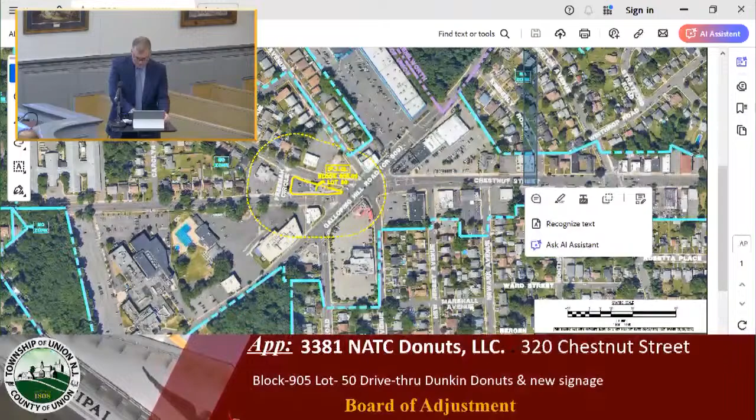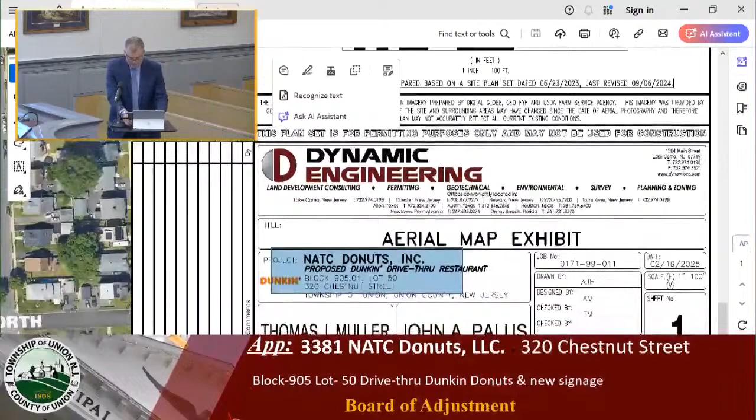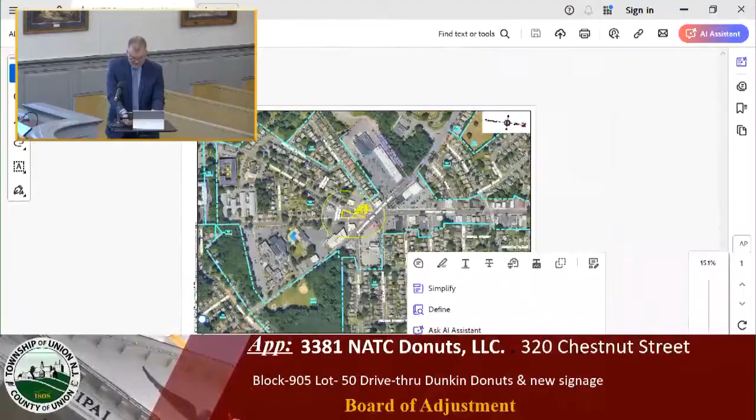The first one is up on the screen now, entitled Aerial Map Exhibit, with a preparation date of 2/18/25. It's similar to the aerial map in the site plan set, not modified for presentation tonight. So we'll mark that A8. Just putting this up on the screen to give the visual.

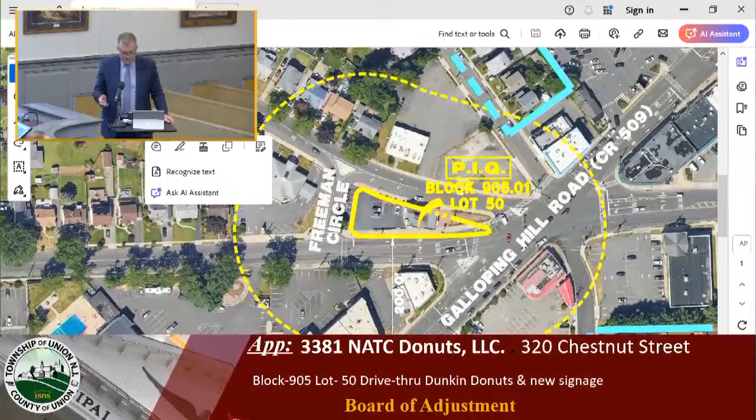I'm sure the board is very familiar with the location of the site at 5 Points. The site is bound, as you look at the parcel in question, outlined in yellow, noted as block 905.01, lot 50. It's a lot of 0.253 acres, or just a smidge over 11,000 square feet. You can see it's an irregular shape, triangular shape, and it is bound by Tucker to the west.

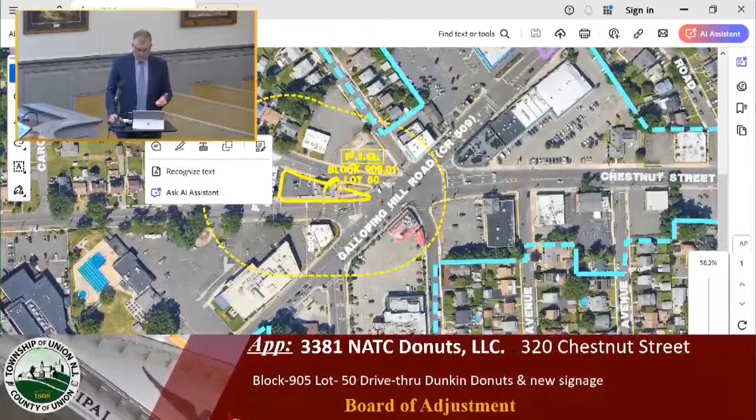You have Chestnut to the east, and Freeman Circle, which is the connection between Tucker and Chestnut, to the south. Surrounding the site, really on all sides, are all commercial properties in the NC zone, and just beyond that, beyond those commercial uses, are residential uses, as you can see in the exhibit. That's really all I intended to do, is just to give basic bearings with respect to the location of the site via this plan, and then I'll look to move on to the next exhibit.

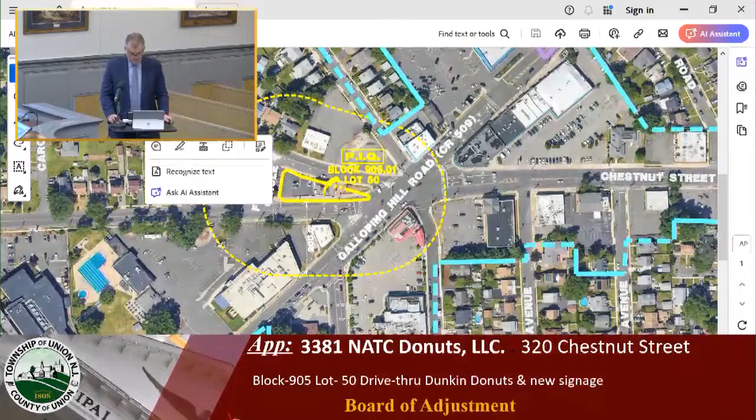Sure, Brett. Just to confirm something I mentioned in my opening, this site is bound by 2 roadways that fall under the County of Union's jurisdiction, correct? That is correct. Both Tucker and Chestnut are under county jurisdiction.

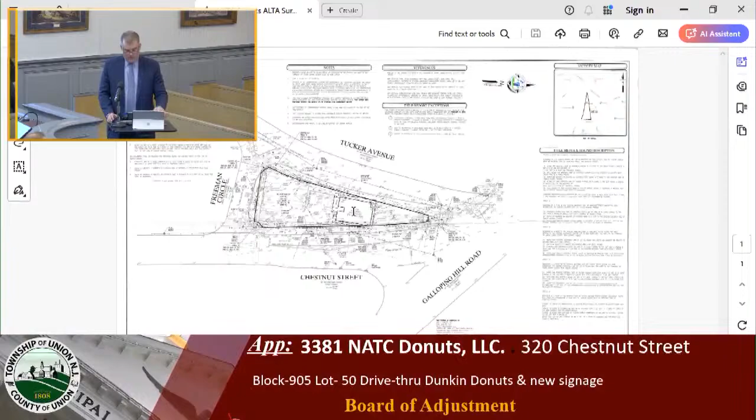Currently on the site today is an existing Dunkin' restaurant, of 1,453 square feet. There are no drive-throughs. It does have two access points, one at Tucker Avenue -- I'll zoom in a little more to the plan -- there's one access drive off of Tucker, very close to the turn getting onto Freeman Circle, and then directly opposite that on Chestnut is the second driveway.

There are 16 parking spaces that serve that restaurant currently today, and as you can see, most of the site is comprised of the building, the paving, and then out in front towards Galloping Hill Road to the north is a paver area that also has the current ID sign located within it.

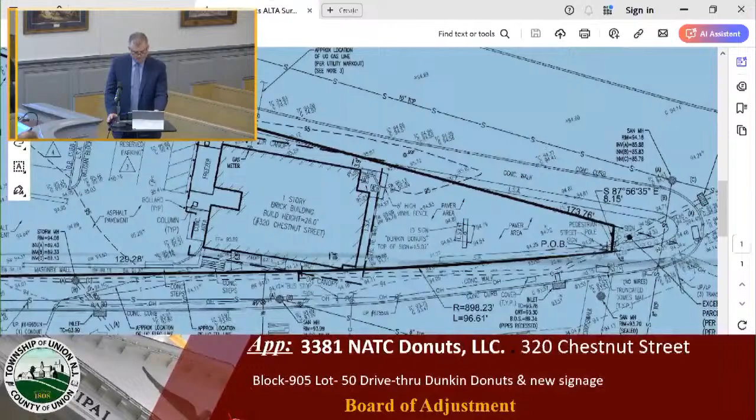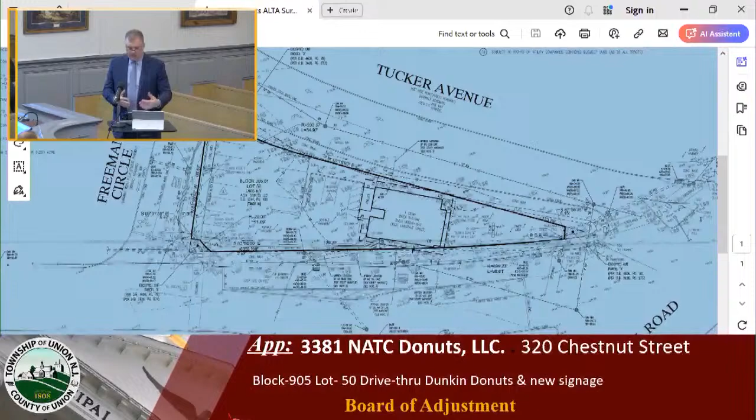As I noted, and we'll go through this further when we talk about the variances and waivers, you can see the irregular shape in more detail here. The building, as it currently stands, sits basically right on the property line with Chestnut Street, almost on the property line with Tucker. Same thing with the ancillary parts of the current layout, the parking, the trash enclosure, all sit in very close proximity to the property lines. We're going to be looking for similar relief for those same structures, but we're looking to improve upon that with the new plan. You'll see that as I turn to it in a moment.

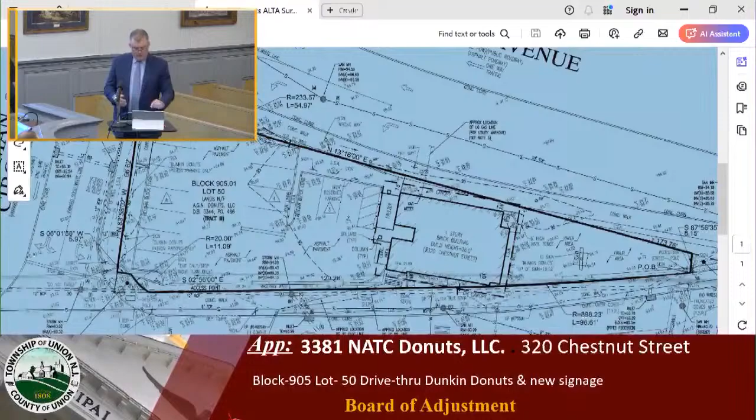With respect to this plan, all existing utilities are there today, and we're looking to utilize all those same utilities. There are sidewalks on both Tucker and Chestnut that exist today. We're looking to replace those upon our discussions with the county, and I'll show that in the proposed plan as well.

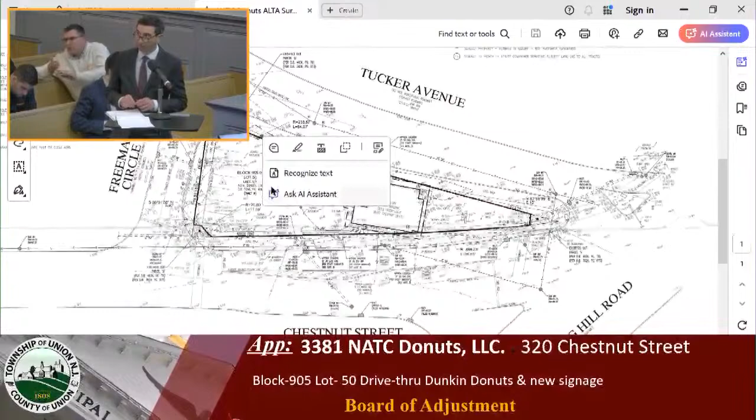Before you move on, regarding existing site access and circulation, are there any restrictions currently, or are those just free-flowing driveways? No, there are definitely restrictions. Tucker Avenue right now flows from Galloping Hill Road - you turn onto Tucker, it is one way from north to south, and you're able to either proceed straight on Tucker, or make the left onto Freeman Circle, which is also one way from the top of the page down to the bottom.

As a result, Tucker Avenue is only permitted for left turns in and left turns out, whereas on Chestnut Street, that driveway allows full movements in - you can make left turns in or right turns in - but you can only make right turns out of that driveway. There is a sign that prohibits left turns out of that drive. Chestnut Street is two-way, so you can travel in either direction.

So if there are no other questions with regards to the survey and the existing conditions, I'll move on to the proposed plan.

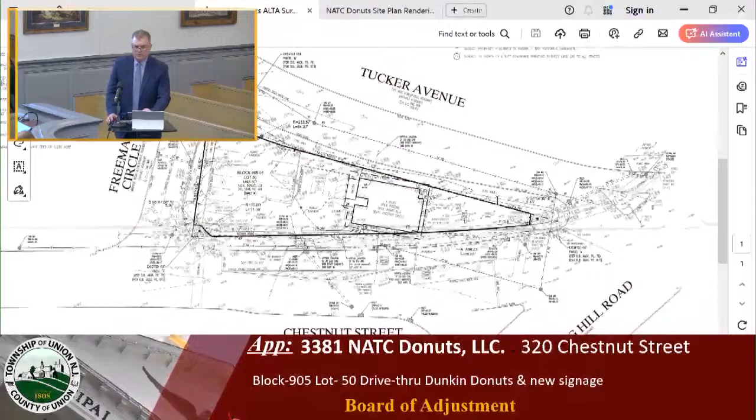And you know what, I'm sorry - I didn't do this, Joe. I did not describe the aerial for the survey record. It was A9, yeah, you're right. I didn't describe it. You want me to just throw the description on the record? I noted it for the record. A9 is the ALTA survey version, and A8 was the aerial map exhibit. So we're up to A10, I guess, which is this colorized aerial.

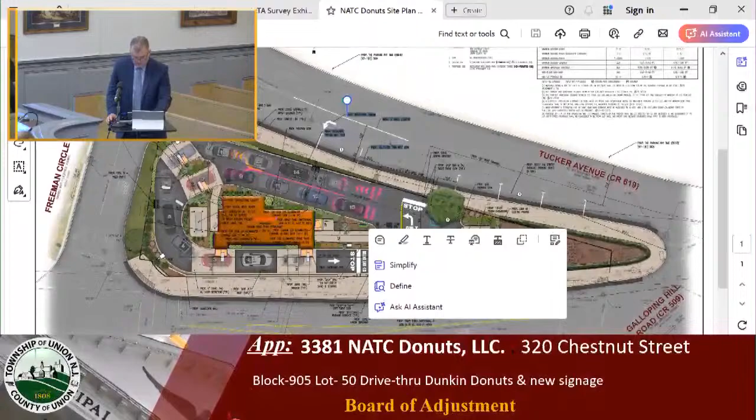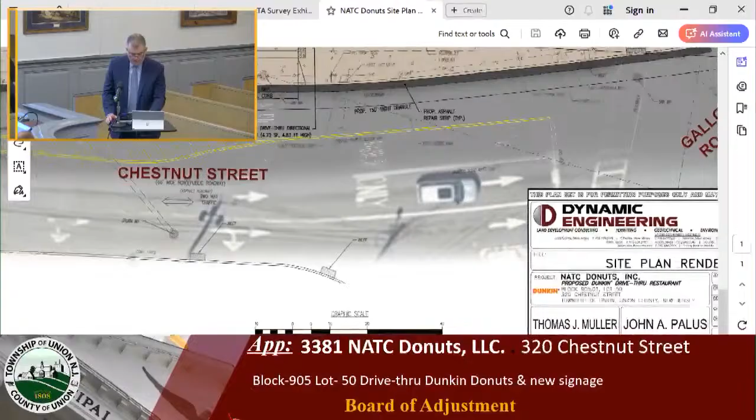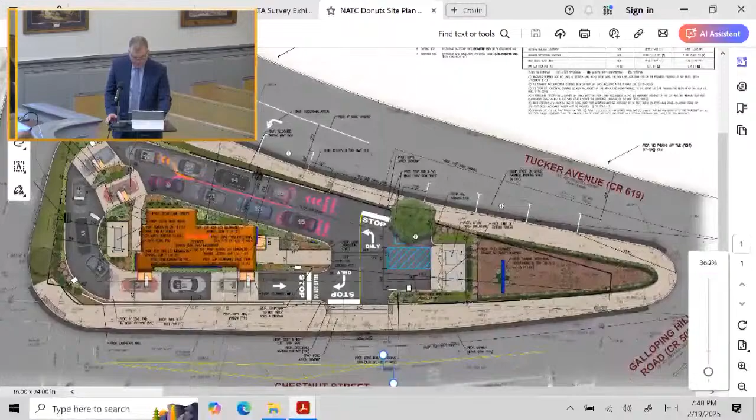Yes, and A10 is the site plan rendering, with a preparation date of 2/19/2025. This site plan rendering is a colorized version of our site plan, which has been enhanced to show the colors of the building, paving, and pavers. You can see those pretty clearly, but also landscaping, highlighting sidewalk and other concrete areas being proposed on the site, as well as those that exist around the perimeter of the site. So once again, same configuration as the previous two exhibits, with Tucker to the top, Chestnut to the bottom.

The proposal is to demolish the existing building and construct a brand-new structure of 1,090 square feet, approximately 350 feet smaller than the current structure that's out there today. So a smaller structure, and now we're going to introduce the drive-through component, which is not there today. So it'll be drive-up lanes, two entering into two ordering windows or ordering stations.

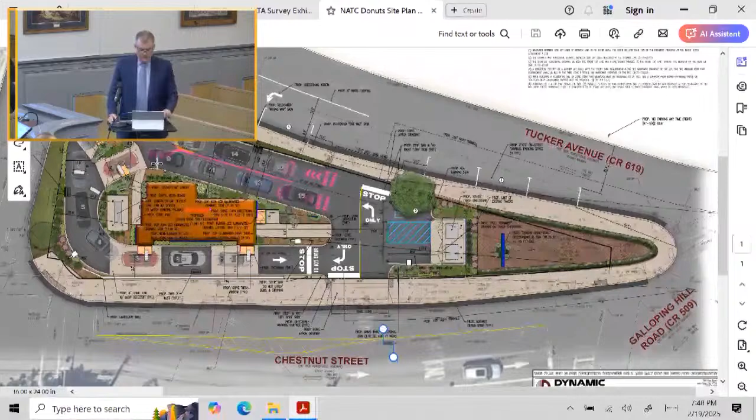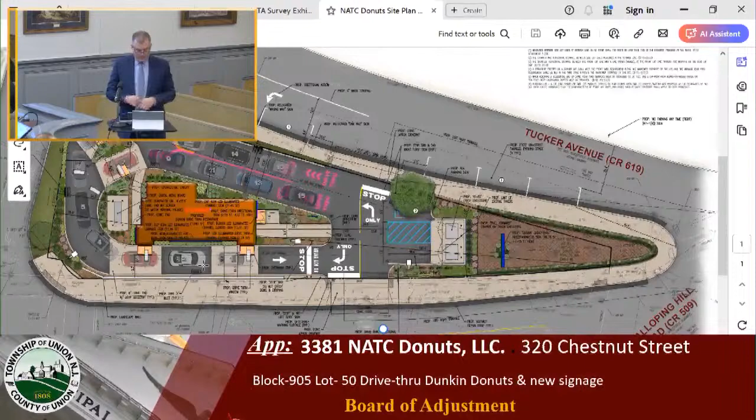Those are located in this plan in the upper left-hand corner, as you're looking at the plan - I'll move the cursor to it. I'm sorry, this is my first time not using a paper exhibit and using the electronic one, so it'll take me a moment to get used to my bearings here. So you have the ordering stations, which turn into a single lane that proceeds around the building in a counterclockwise direction. We only propose 2 parking spaces on the plan.

Per code, this is a restaurant. For restaurants, code requires 1 parking space per 60 square feet of floor area, but notes that net floor area is defined as public area. We don't have public area inside this building - only employees will be in here. There will be no seats, no ability to walk up and order. You're basically only ordering through the drive-through lanes. So with no employees in a public area here, we technically, per code, require 0 parking spaces. But we are providing 2.

Those are located off just to the north of the building - I've moved the cursor there - and just beyond. One of those spaces is an ADA accessible space, a van accessible space.

We are moving, as a result of that shift of the building to the south from where it's located today on site, we're also moving the access. This was obviously the key point, as Mr. Reparo noted, why we had our discussions up front with the county and ultimately the police, to get an understanding that our shifting of the building, our movement of this access, particularly given the unique arrangement of the roads, how they all fall together. It's 5 points, multiple roads, multiple intersections, that they would be accepting our change to the access.

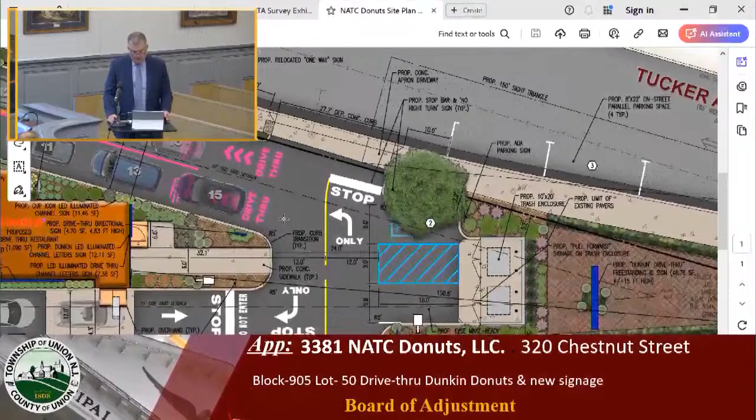When it comes to building facade signs, there is one on each side of the building. The requirement per code is 10% of the facade area allowed for each sign, and we fall under that requirement for each one. The north facade sign is 22 square feet where 34.92 is allowed. The south facade is 11 where 35 is allowed. The east side is 81 where 87 is allowed. The west facade is 11.5 where 87 is allowed. So well under for each one of those locations.

When it comes to sign dimensions, they all meet the requirement, including clearances and projection. As for illumination, the signs on the north, west, and south sides are internally illuminated. The one on the east side, the largest sign, is externally illuminated with 10 gooseneck lights that shine down and project light onto the sign, positioned so you won't be able to see the fixture itself.

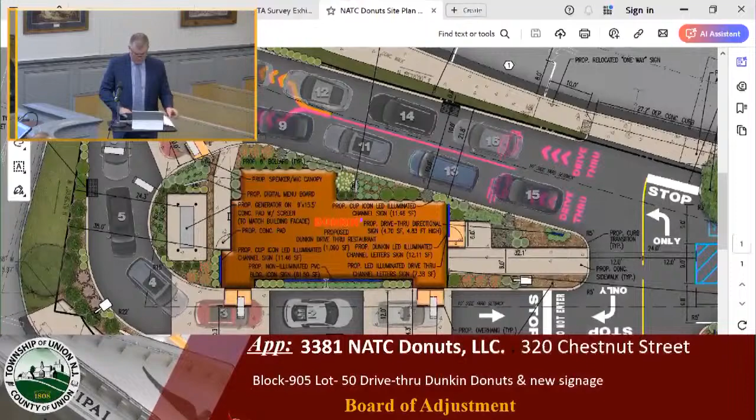There's a couple things, Brett, if you're done with your direct, I wanted to circle back to. One discussion point, my understanding, with the county was what's shown on your plan as proposed parking on Tucker Avenue. Can you speak to that? Yes, I can.

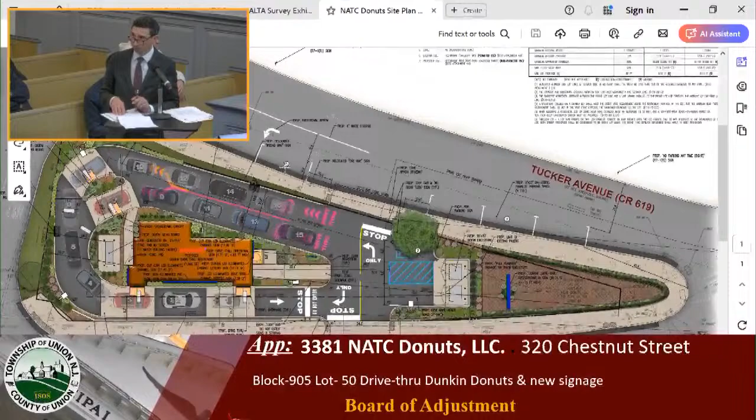So, I mentioned that there are two parking spaces on site, but we were also proposing 4 parking spaces parallel on Tucker Avenue. You can see those designated. I'll zoom in a little further. They're up against the curb, parallel, 3 to the north side of the driveway and 1 to the south side. The county, as part of their endorsement of this project, endorsed those parking spaces in their right-of-way. So technically speaking, while those are off-site, we do have those 2 on site plus the 4 to utilize, so 6 in total for the plan.

We're going to have the operator come up shortly to talk about operations and additional information. Your understanding from discussing this project with the applicant and the operator is that that's effectively where some folks are parking now currently, correct? That's correct. So this proposal is really just formalizing what's happening out there today. Is that accurate? That's right.

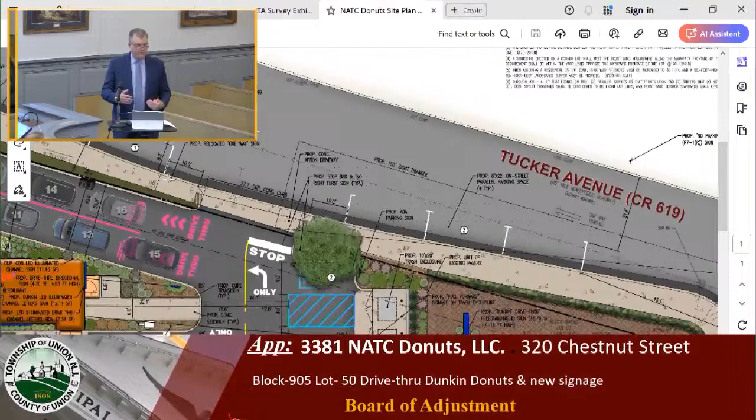Tucker Avenue, from an engineering standpoint, you mentioned it's one way. Are you comfortable that because it's one way only, having those parallel parking spaces will still allow sufficient drive aisle width? Yeah, absolutely. It's not only one way, but it's a very wide cartway that's there. So there's more than sufficient room to provide those stalls and still allow for safe movements, both for cars to veer off either into the lane to go straight ahead, and also get into the lane making the left-hand turn while a car is parked in the parallel spot, south of the driveway. You have enough room for 3 cars side by side there.

Great. And again, I know operations testimony will be coming shortly, but you worked with this operator and applicant regarding what's anticipated for deliveries and refuse. Your office took a look at the types of vehicles servicing this facility - have you designed this to accommodate those vehicles? We did, and in our plan set at the end we do have a truck turning exhibit for the garbage truck. We see no issue with that.

Our client works with a private hauler. They'll ensure the timing of that truck delivery isn't coinciding with peak hours of operation at the facility, but we do have enough room for the vehicle to enter in. Not unusual for a site, other Dunkin' sites, for the truck to make a couple different maneuvers, but he can get in to maneuver, back in, or go in if it's a front loader, forward to the trash enclosure, pull out the bins, dump them, and then back up and maneuver on his way. We show that in one example of one maneuver that can be done in the plan set.

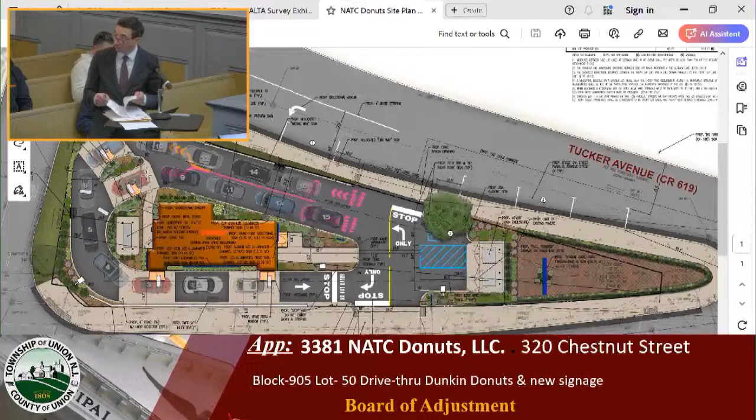Brett, you've had an opportunity to review the reports. We've already identified that police and fire no longer have any comments regarding this application. The Colliers report, the township engineer dated November 18, 2024, you've hit a number of these items. I know the planner will talk to the variances. From an engineering standpoint, is there anything recommended by the township engineer that you take issue with, or that requires a response, or are all these satisfactory?

There are just a few, and I think starting with, obviously the first page is a summary. Page 2, no comment. There's statements that I agree with.

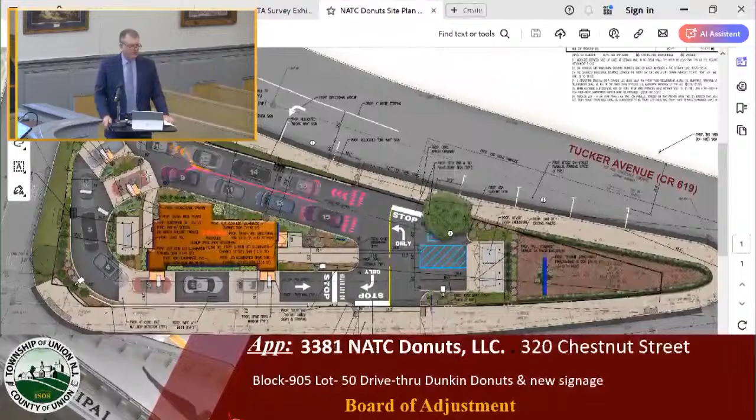If you go to page 3, item 1.8, it brings up the number of parking spaces. We do have the 2, as I described before, in accordance with the calculation done based on a restaurant use. It's noted, though, that the ordinance requires 5 parking spaces, and I don't necessarily agree with that because the 5 parking spaces doesn't conform with the restaurant requirement. But regardless, I did note we do have 4 parking spaces out along the street, so we have a total of 6. So it's really we have 2 on site, 4 outside, total of 6. I think we meet the requirement as a result of that. It's just that we don't have all of them located within the confines of the property.

Item 1.16, we need to address, and that's for parking spaces requiring a 2-foot overhang. For the 2 parking spaces that we have on site, for the stall that's not the ADA stall, we do have the overhang, so we have an 18-foot stall. Then we have an area of concrete before we get to the trash enclosure, so there's room there to meet the 2-foot overhang requirement. But with respect to the ADA space, we don't have that. We have a sign and some landscaping that's prohibiting that 2 feet from occurring. We'll shift that sign and the landscaping back to be able to meet that.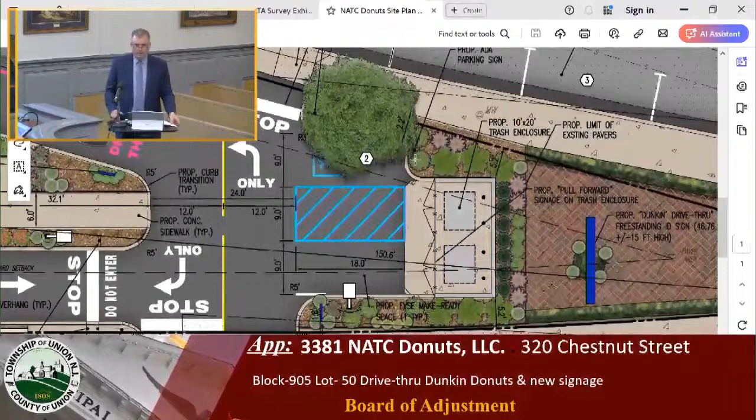So 1.16 will be satisfied? Yes, we will satisfy that. I think I touched on 1.17, which is a statement noting that the parking spaces need to be on-site, but we do have the ones that are off-site that we're utilizing for our benefit. I have no other comments on the rest of page 4.

On page 5, I do want to address, under traffic and circulation, number 6, the first bullet, there is a request by your engineer to install a concrete median in the driveway on Chestnut Street. As I noted, Chestnut Street is the driveway that we are proposing as right-in, right-out. But the county does not allow for concrete medians within their right-of-way. So in order to facilitate putting a concrete island that'll channel traffic, that island needs to be within the right-of-way, and the county does not permit that. So we will not be putting a concrete island there.

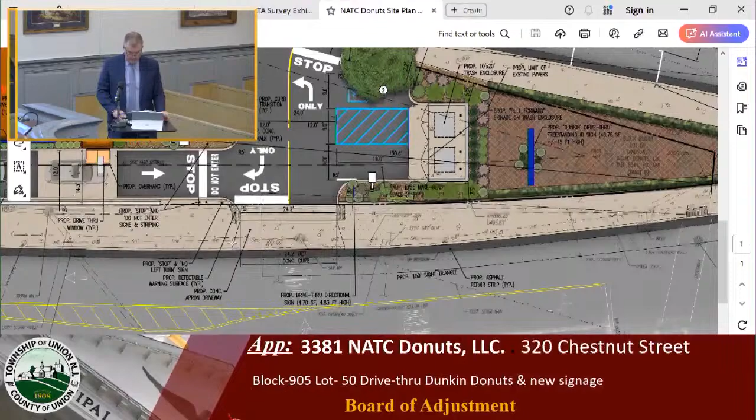Do you know if Colliers is aware of that, or can I note as a follow-up with them so they understand it? Yeah, we would follow up with them, but again, it's a county standard not to put that. I understand, but I don't know if they have an alternate recommendation that might apply. We can contact them to go through that and make them aware of the county's response to that item.

I don't have any other comments. Everything else is satisfactory? Yes. If this board were inclined to approve the application, you could satisfy the remainder? Yes.

Board members, I have nothing further for Mr. Scapinetti, and that's it on direct. Again, I just want to be clear that we have extensive operational testimony coming, and we do have a traffic engineer that's going to talk about circulation and traffic-specific testimony. At this time, are there any board members that would like to question Mr. Scapinetti on the testimony he has provided?

Hearing none, are there any members... I have a question. Mr. Benavente? My concern was food delivery. You mentioned that there'd be a 30-foot box truck that would come in. That's right. A couple questions.

You mentioned it's going to come off-peak. Let's say it doesn't get there off-peak, what is the alternative? Second, you said it's going to take up the inside lane where cars 13 and 15 are designated. I think 2 cars are shorter than 30 feet, correct? No, with the space in between and the length of those cars, no, we would be at 30 feet there. Okay, my next question is, so it's going to be able to make that turn.

Let's mark this one - we're up to A11. Can you describe what's on the screen as A11? This drawing is numbered A1, it's the proposed floor plan. This is a 2-sheet exhibit dated February 13th, 2025.

What's displayed on the screen is the floor plan for the proposed Dunkin', correct? Yes. What you have here is the proposed floor plan. I want to start by saying this is the state-of-the-art drive-through from Dunkin' Donuts - a skinny-down version from a typical store, with no sales area, no customer seating, no tables and chairs. This facility is strictly a drive-through operation, and since COVID, Dunkin' has devoted enormous resources to making the drive-through more efficient.

Back in mid-1990s, I worked for Dunkin' Donuts for 10 years as a construction manager, and I worked on the first drive-through in Totowa, New Jersey, where we had the menu board right next to the window, so it was sort of a pull-up type operation. It's come a long way in making this as efficient as possible.

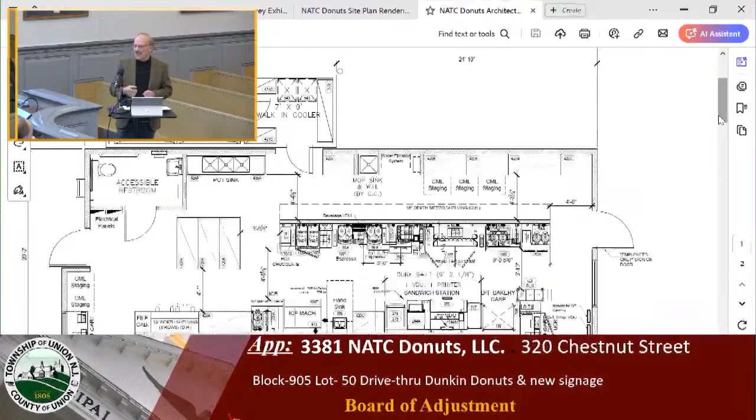It's called an omni layout, where all the equipment is very closely stacked together in proximity to the window to maximize throughput and efficiency, so that cars could continue through the drive-through lane without any substantial impediments. Both from an exterior site plan and interior floor plan, this facility really addresses maximizing the efficiency of the drive-through.

Having worked in this industry for many years, the dual lanes, the separate pay and pickup windows, and the modified interior layout are what distinguish this proposal. A typical drive-through has one lane, one menu board, and one window. We have two drive-through lanes, two menu boards, two windows - one for the monetary transaction and one for pickup. It's by far the most efficient layout and site plan I've ever worked on.

Before we move to the elevations, there was discussion about the signage, and we want to show those pictures that you prepared. I'll do the exterior elevations.

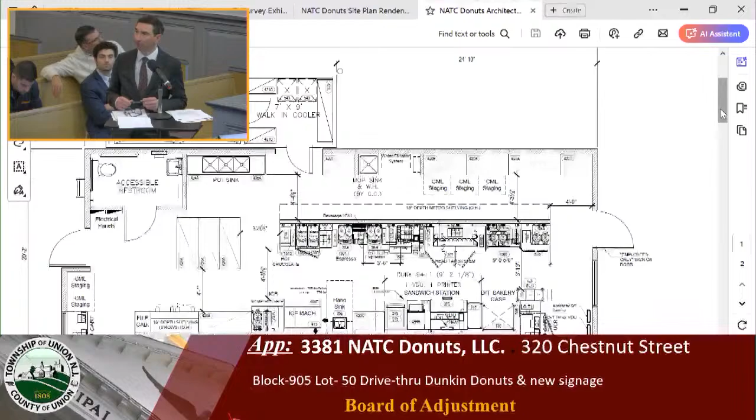This facility is a little over 1,000 square feet - the proposed is 1,090 square feet, and the existing comparison building is over 1,400. This is a significantly smaller building for this site. A typical Dunkin' without a drive-through is about 1,800 square feet, so we're considerably smaller since we don't have a customer sitting area.

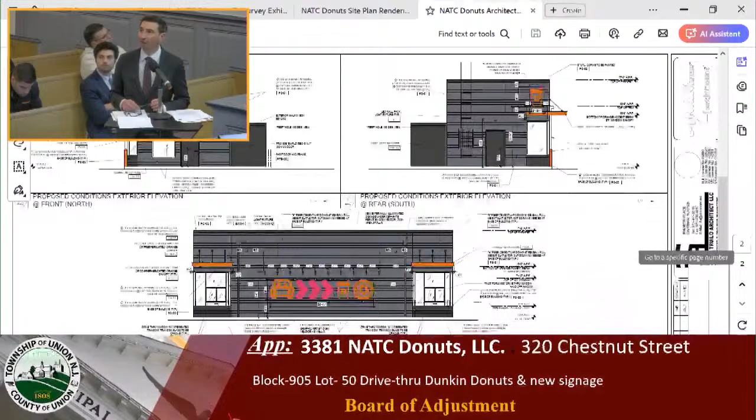If you could walk the board through the exterior elevations - I spent considerable time bringing up the aesthetics as far as the latest concept and signage package. The elevation at the top left of the sheet represents the elevation facing the Five Points intersection. We have a Dunkin' drive-through sign here, internally illuminated, with an orange accent band, and in the background you can see an overhang over the drive-through window that shelters the drive-through function during inclement weather.

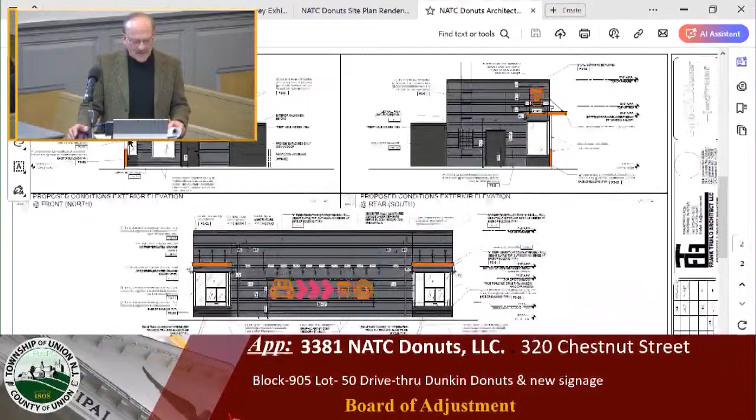The building is composed of Hardie plank siding, which is a cement fiber board. It looks like wood, but it doesn't rot and lasts far longer than ordinary wood. This door here is the employee entrance door, and it's also the door the employee would use to deliver a large order to the pull-forward customer.

The elevation to the right is the elevation facing Freeman Circle. We have a Dunkin' Donuts coffee cup icon, which is internally illuminated. You can see on this side we have the drive-through canopy. This is over the pay window.

The elevation in the middle of the sheet represents the elevation facing Chestnut Street. We have graphics in between the two windows. These graphics are not internally illuminated. They're vinyl decals stuck onto the building, and then we have a series of light fixtures. They're small LEDs, 4-inch diameter, and they shine directly on the sign, so there's no glare onto Chestnut Street. The first window on the left is the pay window, and then this is the actual pickup window.

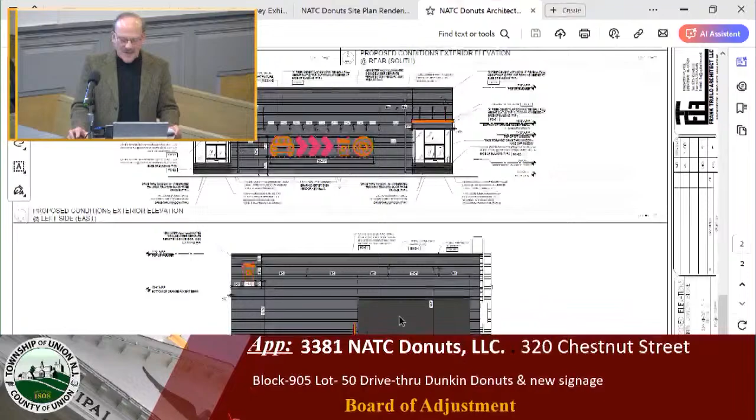The elevation on the bottom is the elevation facing Tucker Avenue. We have an illuminated coffee cup icon here, and then you'll see the exterior walk-in box outside here. Normally the walk-in box is a silver metallic color, but we decided to have it factory finished to match the building color so it blends in with the building and doesn't stick out, sort of like a sore thumb.

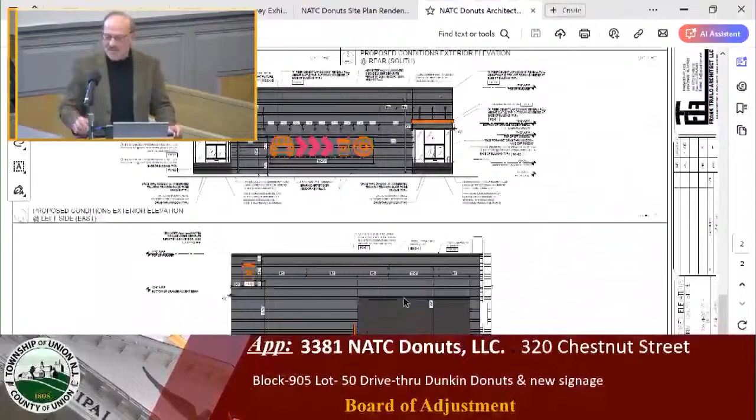So that's my testimony. Any questions, board members? Thank you, Frank. Are there any board members that would like to question Mr. Truello's testimony?

I do, just with the pullover area. I don't know if that's for a traffic engineer or a civil engineer, but is there any concern that it will impede traffic trying to get out? No, that's the pull forward parking space, an actual parking space that a car will pull into, and it would not block any ingress or egress out of the parking lot. We can certainly have the traffic engineer identify that.

We'll bring the site plan back up. It's a great question. We'll make sure both Mr. Diemar, the operator, and the traffic engineer address it. We'll show you on the plan. Any other board members with questions for the witness? Hearing none. Are there any members of the public that would like to question the testimony Mr. Truello has given? Hearing none.

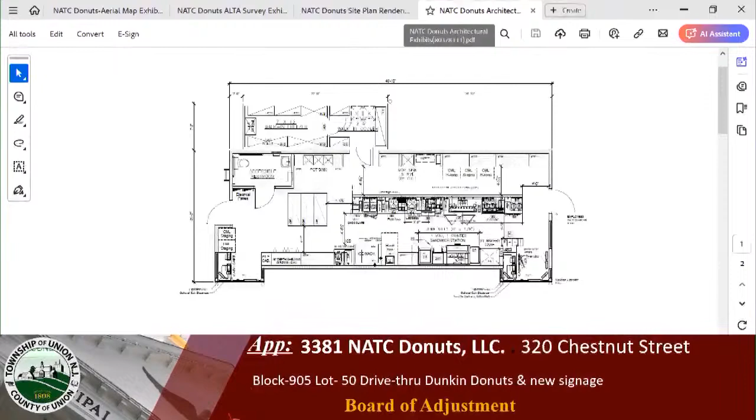If you go back to the board, a member had a question about the spaces. Can you just identify, using description since you don't have a pointer, where they pull up to? So they would pull up right to this point — this parking space right there.

In front of the dumpster, that would be where they would be directed to park. Is there also space where in front of the last pickup window for someone to pull up? There could be space. If there's ever somebody in that spot for whatever reason, we could direct them to one of the spots on Tucker Avenue. Preferably, we would just have them pull up a little right in front, and another car would be able to get around. If not, they would pull up into that space. Okay, thank you.

And you mentioned that your average order to pick up is approximately 2 minutes, 30 seconds, correct? Yes, 2 minutes, 30 seconds. And in the QSR industry, quick service restaurants, how does that fall compared to some of your competitors? Much faster, and that's by design. There's no frying, we're really just using turbo chefs, there's no big cooking operations, the customizable options are not as crazy as a Starbucks. We're really focused on people just getting their hot or iced coffee and getting it to them as fast as they can and still ensuring product quality. That's our number one priority. Thank you.

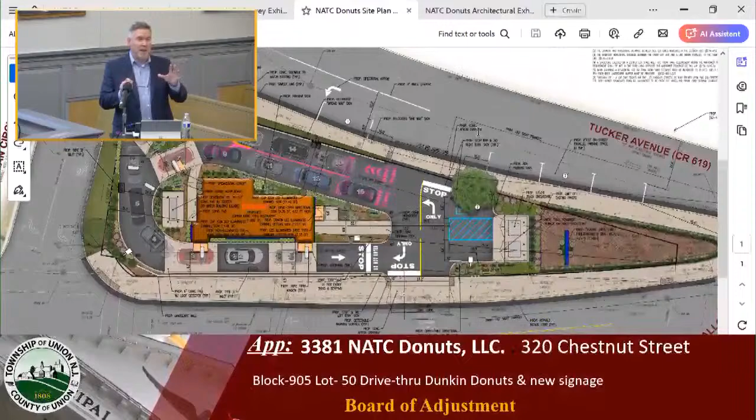In our counts that we did of the existing conditions, we really had to pay attention because not everyone parked on site that came. Some parked on Tucker, some walked. So we had multiple people stationed to see who was walking in versus who parked. We have all those numbers in our report, a percentage of them were walk-in or parking on Tucker.

Now you're not going to have any of that. So now everyone's going to be in their car. We anticipate about 80 customers in that peak hour in the morning. If you look at the drive-through...

Nicholas talked about the 2.5 minutes, even utilizing a conservative 3 because it divides into 60 a lot easier. If it took 3 minutes to get from the order board to leave the site, there are 7 vehicles in between that point, so every 3 minutes you're going to get 7 vehicles through. There's 20 of those periods in 60 minutes, so you could, in theory, get 140 vehicles through. We only have 80 that we anticipate are coming there now.

We also did counts at a number of Dunkin' Donuts facilities. There's some data in our report: Eatontown, Hope Road, Ocean Township Route 35 North, Keyport Route 35 North. Those are pretty busy sites, and we also picked the Garden State Parkway northbound as well for our report. Then, since we did all of that, this operator opened in Edison on Inman Avenue, and we looked there, and it was similar queuing at that location. At peak times, the maximum number of cars we ever saw was 11 or 12 vehicles in the stack.

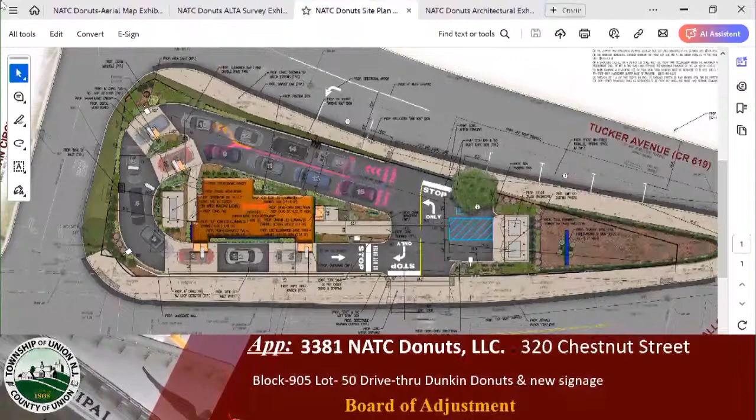As far as the vehicle, in this location it's more likely to discourage someone from trying to make a left out because the queue is backed up to that location most of the time periods. If you're trying to make a left out of the driveway where it is in the existing layout, it's twice as far from the intersection, so there's a lot of times you're sitting there thinking, oh, I can pull out of here, and you do.

You feel like the traffic... if the cars are stacked in front of you, you're not going to feel like doing it. You might try once, then you'll just go out the other way and come around to the signal, making essentially a 360. So you feel the traffic will be backed up from 5 points closer to the driveway? Yeah, so on the northbound side, during almost every cycle of the signal, the traffic backs up to the location of that driveway. So it's actually a good thing that the traffic is backed up—that's going to discourage them.

And we've moved the drive. If you're familiar with the 7-Eleven, right now the 7-Eleven driveway is opposite the existing driveway, so some people drive straight across because it says no left turn, but they can technically go across. We've gotten rid of that, which is a good thing. Now if you came out of either site, you can't get into the other site directly because the left turns are prohibited. I didn't even bring that up before, but that's a good point, yes.

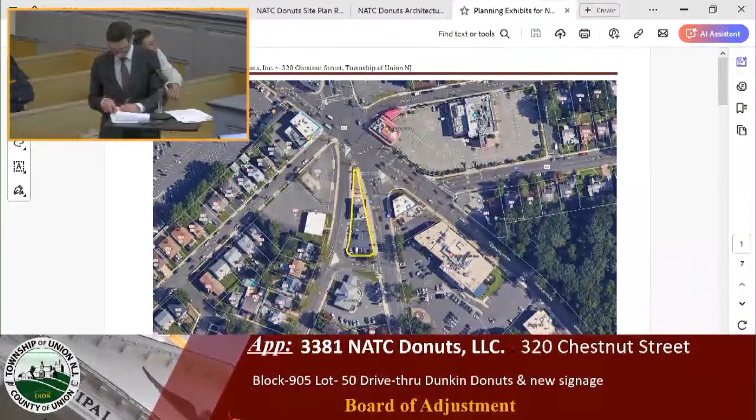Just to dive right in, as was mentioned at the outset, this is an improvement over an existing Dunkin' Donuts facility, really modernizing it, bringing it up to speed with current trends, which is higher demand for the drive-through as opposed to the dine-in option. As we can see on my exhibit here, A12, obviously we are in this 5 points intersection, which the board is aware is not the easiest intersection for pedestrians to cross. I've been stuck in, I think, both of those traffic islands in the past.

Really, this is an area that's more conducive to driving to your destinations, and we can see on the screen there that most of these other facilities have large parking lots, which really speaks to the fact that this is an area where people are driving, not necessarily walking. Like was stated, this is a D1 use variance. We're in the NC zone where drive-throughs are not permitted.

If you were to continue north up Chestnut, it's still NC zoning, the neighborhood core zoning, all the way until you get to the Parkway. So here, I think we're looking at a lot that is pretty unique when you compare it with a lot of those other lots as you go north up Chestnut, which obviously is why we're here this evening. This is a unique property that warrants a discussion on circulation, safety, and general functionality of the property.

I have testified before boards for numerous applications like this for drive-throughs. The typical concerns have been raised by the board at this point, again, in terms of circulation, safety. I think in both of those regards, what we're proposing here is an improvement over the existing in terms of the driveways, as well as the fact that this is conducive to drivers specifically.

The variances we're seeking, like I said, a D1 use variance since drive-through is not permitted in the zone. We're also proposing some C variances: accessory structure side setback, that's the trash enclosure. We're looking at 5.2 feet, whereas we're required to have 10 feet. Existing, we're actually looking at 1.5 feet, so it is actually an improvement over the existing.

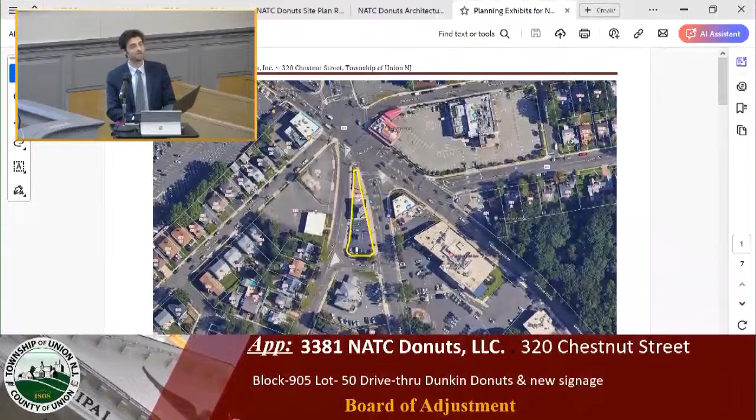The fact that we don't have a loading space, and then fence height—we're proposing 8 feet, whereas we're required to have up to 6 feet.

So really what I did for my planning analysis was I looked at the site itself, I looked at the surrounding neighborhood, and I put together an exhibit here to share my findings in terms of what makes this site unique and particularly suitable for the application before us this evening.

And Matt, all of these photos were taken by your office in preparation for this presentation, correct? They were taken earlier today. We flew a drone up and got some nice aerial shots.

I'll go to sheet 2 here of Exhibit A12, and I'll orient the board. I know this is a pretty familiar location, but again, here we have Galloping Hill Road off in the distance there, and we have Chestnut off to the left, going up north.

Just moving along here, giving the board another view of the property.

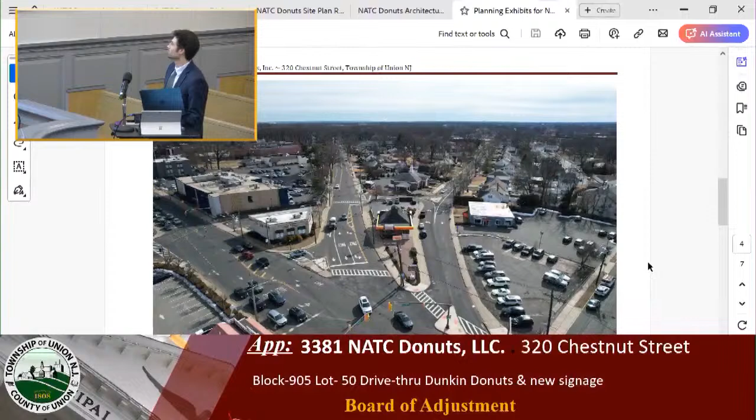Again, this is an abnormally shaped lot. It is this triangular lot that comes to a point at Galloping Hill Road. I think the next slide shows that, where right now we do have this nice brick paver element at the tip of the site there along Galloping Hill, which is to remain, which I think is nice. One of the hardships of this application is obviously the lot shape. If we look at that tip there, it's really hard to get anything in there—building, parking, or anything of that sort—which really is a challenge on this property, getting something that works here.

Did I go the wrong way? Yeah, the next sheet just continues rotating that drone around there. I keep going to the wrong slide.

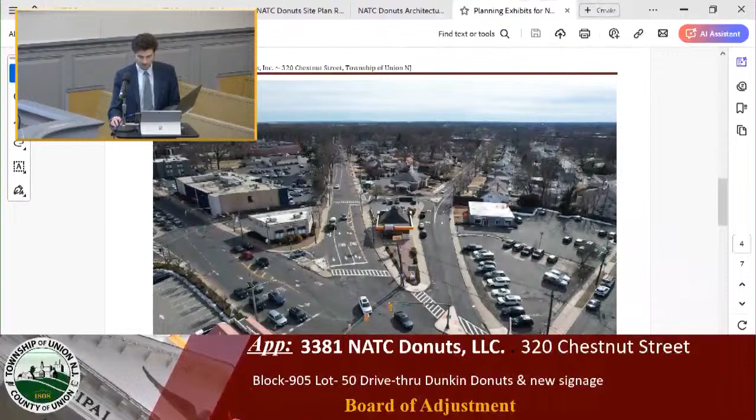And here we get a nice view of Galloping Hill Road. We can see those traffic islands that I mentioned. Again, this is not an area conducive to walkability, like might be more typical of some of these other lots in the zone up north on Chestnut.

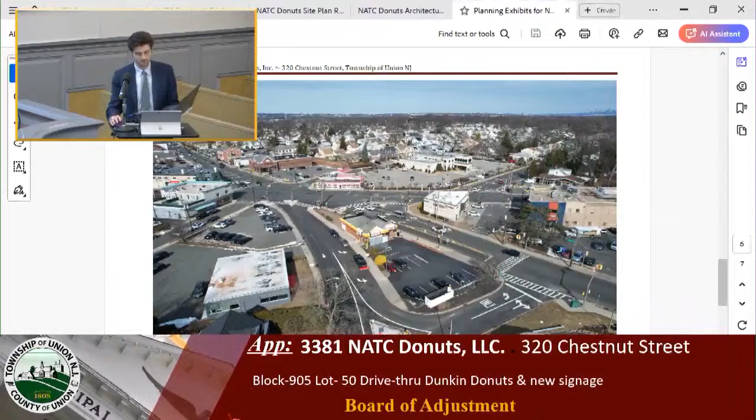And then finally, just a simple aerial top-down shot, again highlighting the fact that this is an abnormally shaped lot. I think what we're doing here is efficient—we heard the architect, the engineer, and the traffic expert talk about how this is the most efficient site plan that we really thought we could put forward for this site.

So in terms of the D1 use variance, the essence of that test is site suitability. Again, since it's a use variance, what makes this site particularly suitable for a drive-through? Again, this is a modernization of an existing Dunkin' Donuts. This is a site that's not necessarily conducive to that pedestrian walkability that might be more typical of other properties in the zone.

I pointed out the fact, and we can see it on sheet 7, that there are many other properties with large parking lots, again signifying the fact that this is an auto-centric intersection, which I think the board is familiar with.

Also, in terms of site suitability, we don't have adjacency to any residential. Of course, beyond the bank, which is on the right of this image here, there are some residences along Chestnut and Tucker. Those residences are actually also in the NC zone, so the zoning actually contemplates mixing residential and non-residential in this zone. So I think the intent really is not to insulate those residential uses from non-residential.

And I'll add that in the NC zone, conditionally permitted are automobile service stations, your gas station, as well as repair garages. So both of those elements have a driving component on site that is similar to a drive-through.

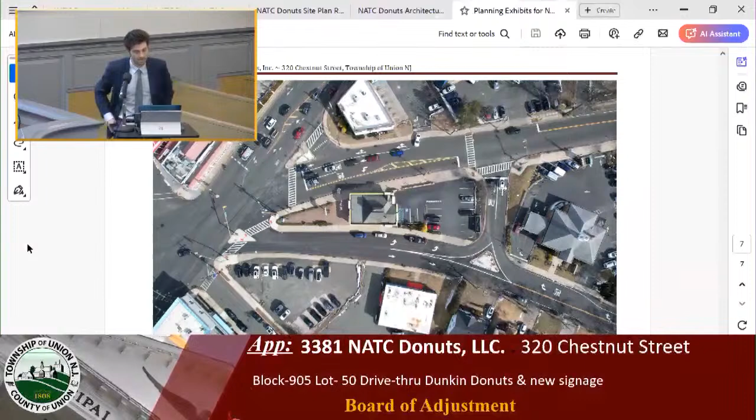So really, for that use variance, if this were a different lot, I would have a totally different planning conclusion. But the fact of the matter is we are looking at a lot right at the 5-point intersection, an existing Dunkin' Donuts that's been there for a long time, and an operator who's been there for a long time and knows his client base very well, and knows how to serve them in the best way possible. With all of that, I think the use variance is satisfied.

Just to go into the C relief, I listed them out already. I think we can look to the C1 hardship tests. Most of this relief relates to the challenging conditions of the property itself. Again, it comes to a point at Galloping Hill Road. We can't really utilize that portion of the property for much, so in terms of the negative criteria, all these variances are necessary to effectuate the use itself.

Appreciate that. Yeah, the design waivers again talk about the parking setback, and you've talked at length about how this property is uniquely configured. I'm assuming your testimony is that having parking comply with setbacks, not located in a front yard where you have 3 frontages like this, creates a challenge and a hardship. Is that test essentially met? Of course, yeah, and I would say arguably we don't really require parking by virtue of the testimony we put on the record earlier. So really the parking we're getting here is sort of an added bonus or benefit.